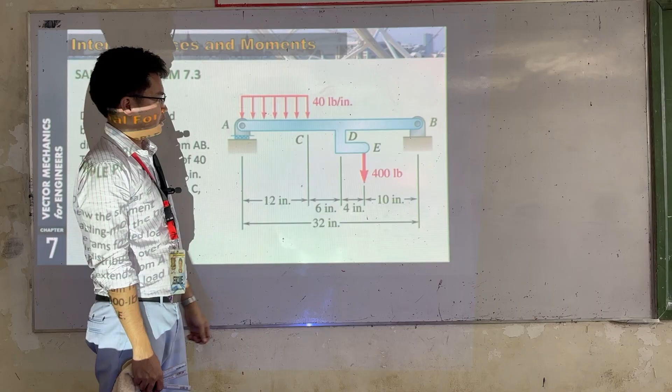So ayan, no? Ano sabi dito? The uniformly distributed is at span na 12 inches. And then we have a concentrated load applied at point E, no? So given na yung mga distances, given yung amount nila. Yung tanong niya dito is, i-drawing mo daw ang shear and bending moment diagram, no?

So technically, yung drawing talaga natin dito is tatlo. We have shear, moment, at saka yung load, no? Yung load diagram natin is represented by our FBD. So ito yung load diagram natin, no? I-drawing natin yung load diagram, schematic lang, gawa lang tayo ng straight line, no?

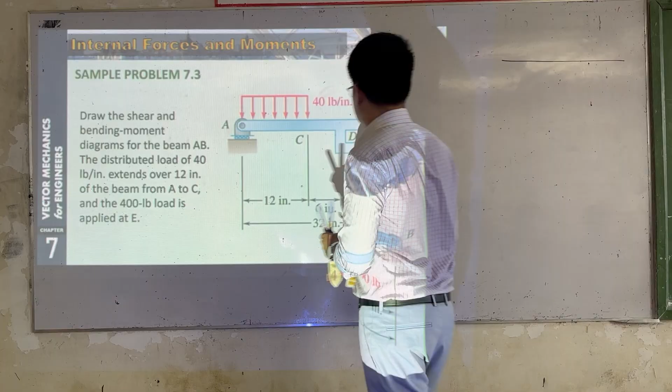And then ilagay natin yung mga points. We have point A, point C, point B. So sulat natin yan. We have point A, point B, point C, and hindi pala—C, D, and then B natin.

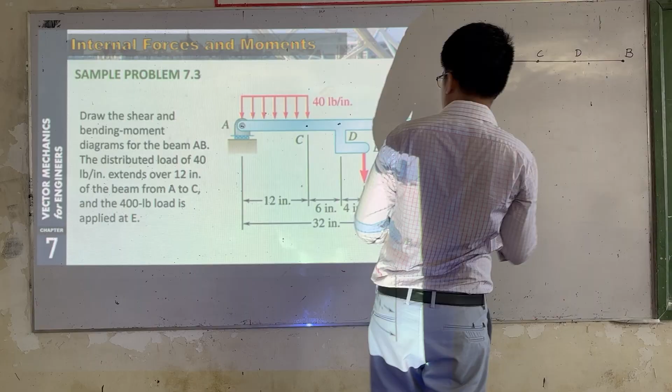So ano yung graph natin dito sa load diagram? We have a uniformly distributed, no? So from here papunta dito, uniformly distributed. Ano yung height nito? 40.

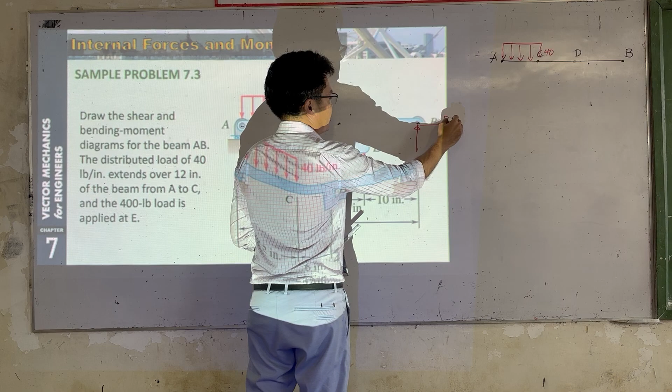So sige, before tayo mag-proceed pala sa shear and moment diagram, isolve muna natin yung reactions at the support, no? So ano yung mga reactions natin dito? We have sabihin natin papunta doon and papunta dito. We have BX and BY. This one here is we have AY only, no?

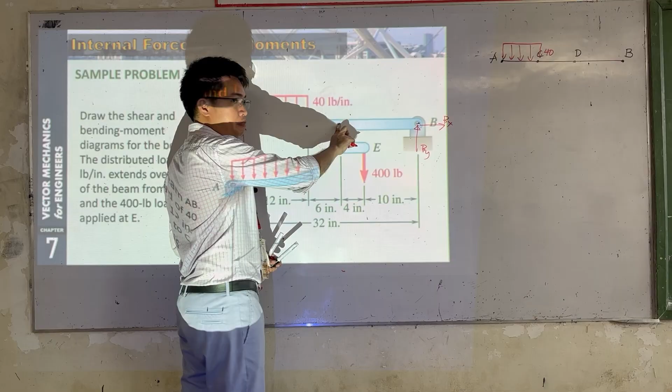How about sa point D? So by principle of transmissibility, pwede ko itong ilipat dito. Tama? Pero ano yung madadagdag? Diba? Basta along the line of action, walang madadagdag. Pero kung hindi ang line of action, ano yung madadagdag? Moment. So ito, ilipat natin dito.

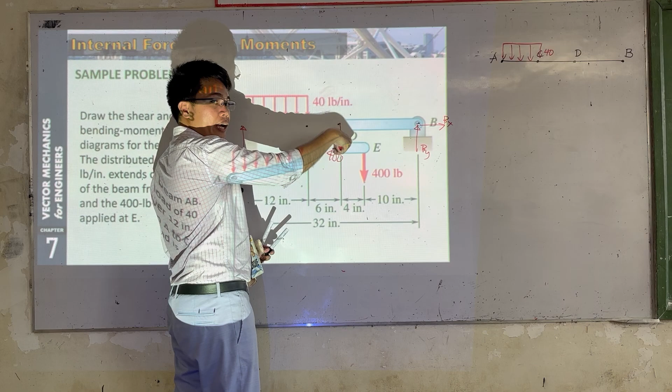This one here is 400. Pero meron tayong madadagdag na moment. Ano yung moment? Clockwise, counterclockwise. Ito. We have clockwise, no? So meron tayong madadagdag na clockwise moment. So ano yung moment niya?

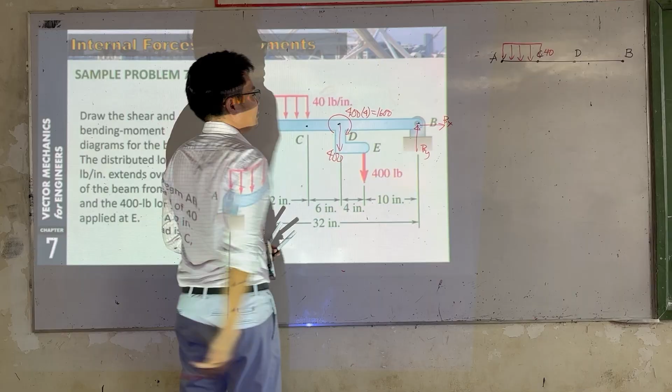400 times the moment arm. Ano yung moment arm na to? 4. So we have 4 times 4 is 16. So 1,600. No? This is the moment at point D.

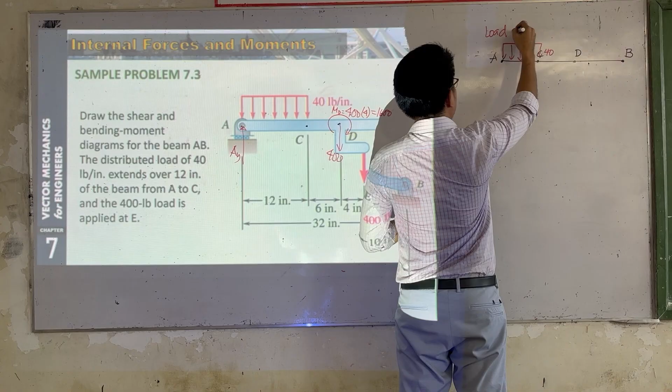So ayan lang. No? So kung i-drawing natin yung tinatawag natin na load diagram, so at point D, meron na tayong, ano yung force natin? Force na 400 and then moment na 1,600. Okay? How about reactions at the support?

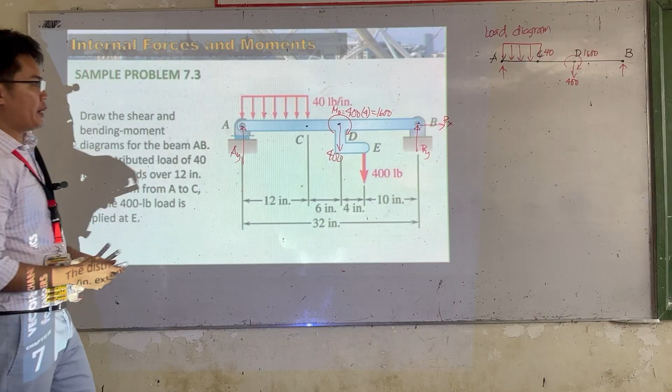Ayan. Meron ba tayong BX? Wala, no? So erase na lang natin diretso. BY na lang. So paano natin kunin si BY? So para makuha si BY, mag-moment tayo at point A, no? Para makuha si BY, summation of moment at point A, counterclockwise positive, ano yung mangyayari?

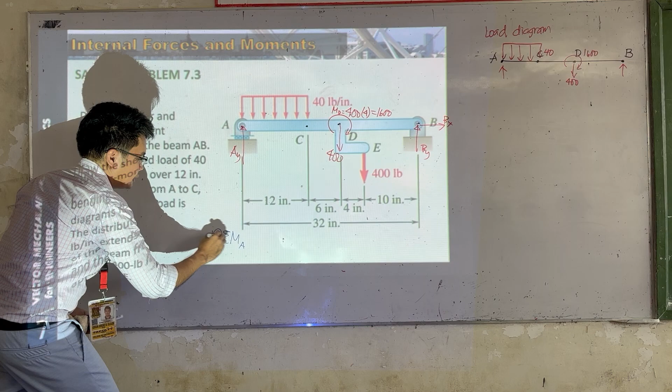Sir, paano yan? Meron tayong distributed force. Ano ba yung gagawin natin kapag meron tayong distributed force? So dito na papasok sa centroid, no? So babalik ulit tayo sa centroid. So nasaan yung centroid ng rectangle?

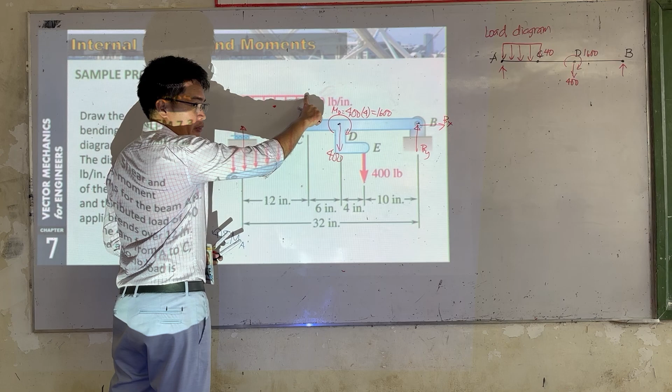Nasa center automatic, no? So ayan, yung uniformly distributed load natin yan, pwede nating palitan ng concentrated load applied at the centroid. The same pa rin yung effect niya, no? So instead of looking at our figure in this manner, uniformly distributed, papalitan natin ng concentrated load applied along the centroid. So ano naman yung value ng concentrated load na ipapalit natin?

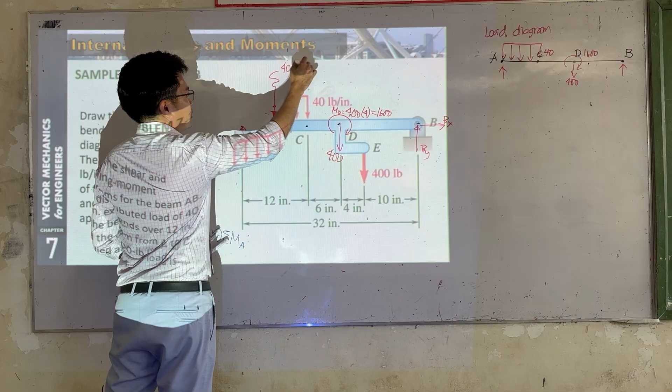So kung ano yung area nito, yan yung value ng concentrated load. So ano yung area nito? We have 40 times 12. So 40 times 12, this one here is, ilan na siya? 480. So ano yung distance?

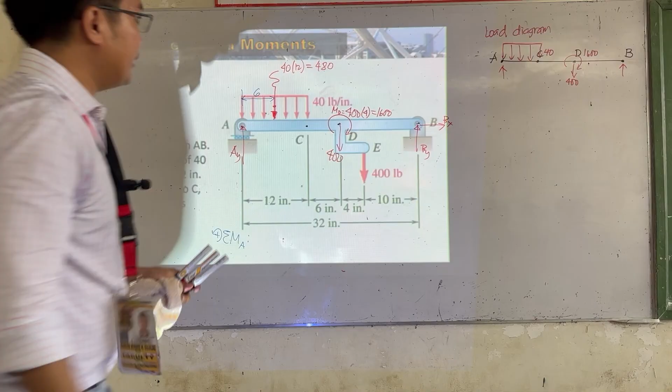Distance nito? We have 6. No? So ayan lang pala. Pwede daw palitan natin si dito ng concentrated load. No, na ano yung value? 480.

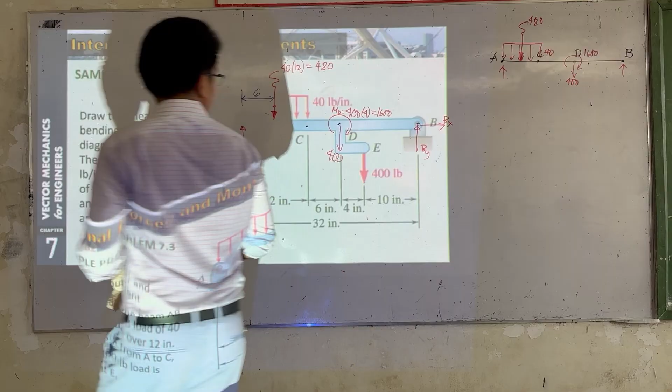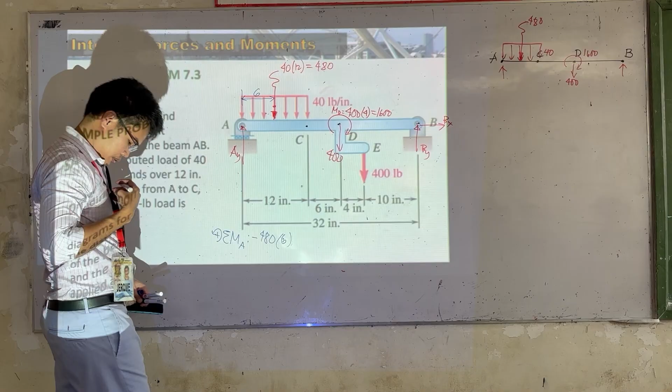So ayan lang, no? So sige, para mahanap natin si BY, paano natin kukunin? Summation of moment at point A. So ano yung meron? We have negative 480 times 6. And then we have ito siya, 400, no? Negative pa rin. 400 times, ano yung distance na to? 18.

And then meron tayong moment na negative din. So we have negative 1,600. Lagyan ko pa ng moment arm, hindi na. Hindi na, naka-moment na, no? So ito, lastly, we have positive BY. Ano yung moment arm? 32. No? So ayan, 32 is equal to 0.

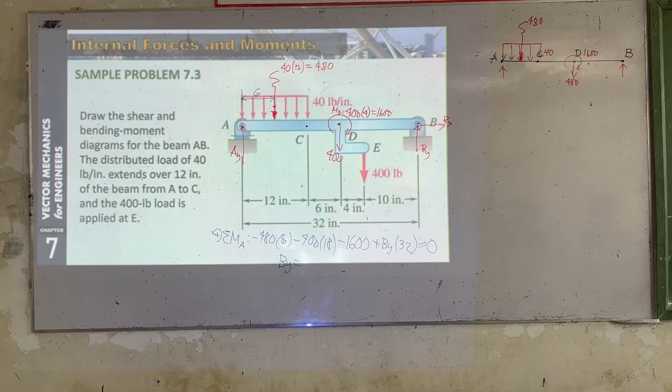So makakakuha tayo dito ng BY is equal to, okay, 365. Ayan, susulat natin dito, 365. And then lastly, sa A, paano kunin si A?

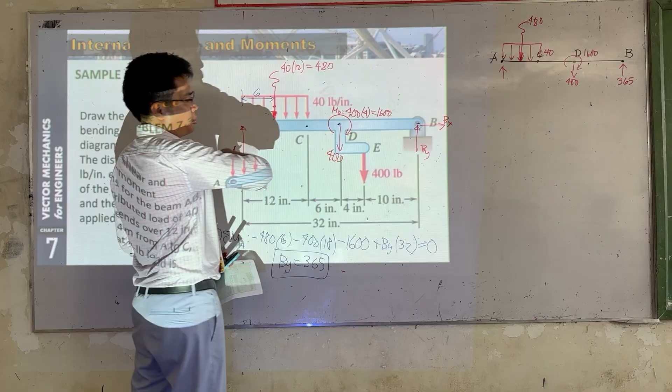Summation of moment at... sige, assuming nakuha na natin si A, no? Alam niyo naman paano kunin, no? Susulat ko na lang. AY is equal to 515.

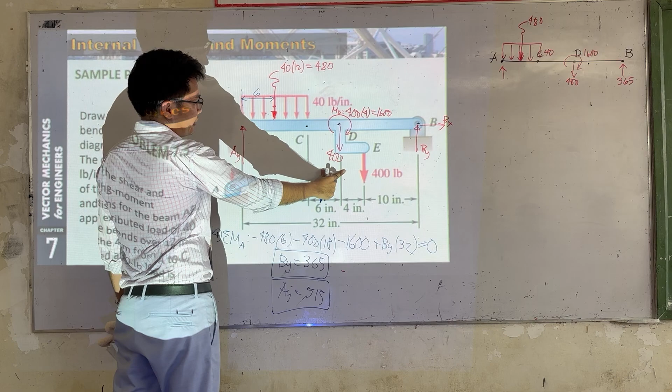Ha? Summation of forces pwede. Oh. Summation of forces lang. So, 480 plus 400 minus 365. No? So, ayan. Sige, ito na yung load curve natin.

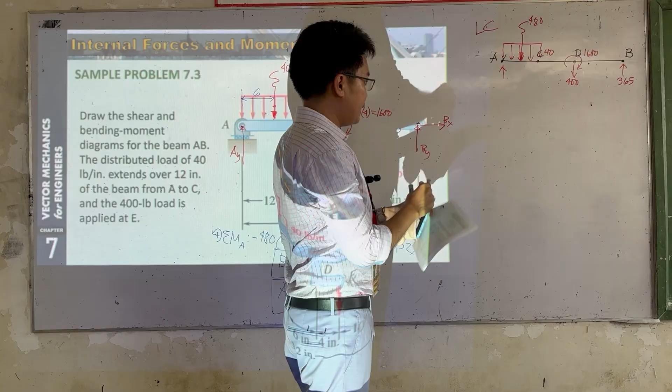Proceed tayo sa shear and moment diagram. Grabe kataas na solution, no? So, ito yung moment, ito yung shear, andito tayo magkakat. Sabihin natin dito. No? So, ito yung sa shear, ito yung sa moment, ito yung X. Sige. Yung gagawin natin dito is i-project lang natin to, no?

Now, ilang segment yung ikakat natin? We have, ito, i-cut natin dito, no? Somewhere dito, i-cut natin to, i-cut natin dito, and then i-cut natin dito. Okay? So, sige. Kung mag-cut tayo dito, ayan, ano yung lalabas dyan?

So, we have, ano yung value ng A? 515, no? We have 515. So, meron tayong force na 515. And then, meron tayong distributed load na ito, no, distributed. Ano yung height niya? 40. Now, ano naman yung distance niya? Ito.

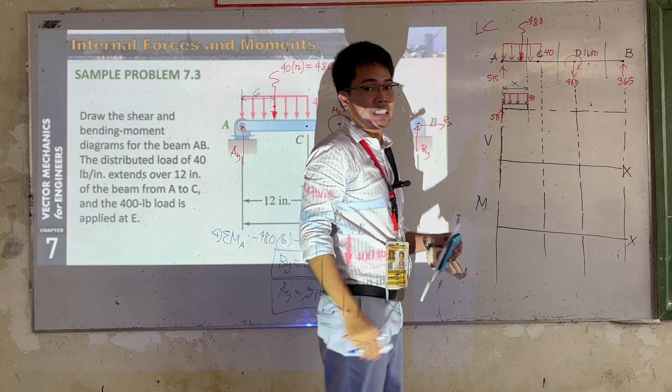X is arbitrary between A to C. So X lang yung value muna natin. Huwag half, kasi hinati ng dalawa, half na dayon. And then huwag kalimutan, we have a downward shear and a counterclockwise moment.

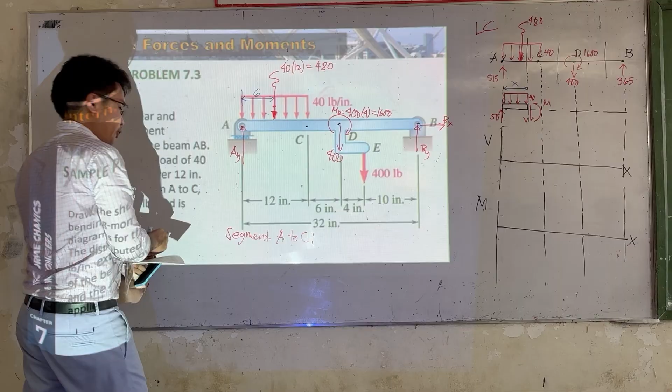Klaro? So sige, draw natin yung shear and moment diagram. Sulat natin, anong segment yan? Segment A to C. So ano yung dalawang equation na paulit-ulit gamitin dito? Summation of forces along Y.

Positive, upward. So ano yung mga involved? This one here is distributed, di ba? So pwede natin yan palitan ng concentrated, applied at the centroid, dito sa gitna. So ano yung ipapalit natin na value? Ang area nito. We have 40 times X. So the concentrated load is 40X.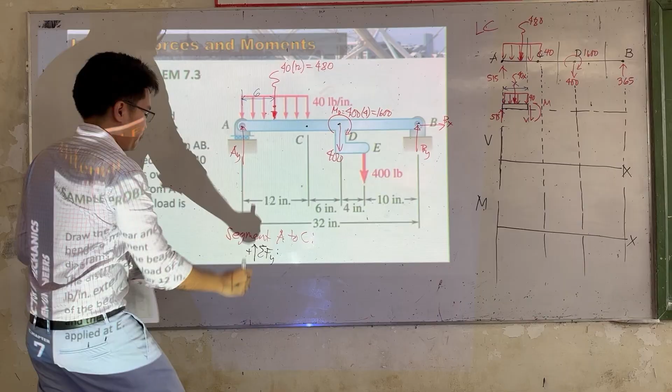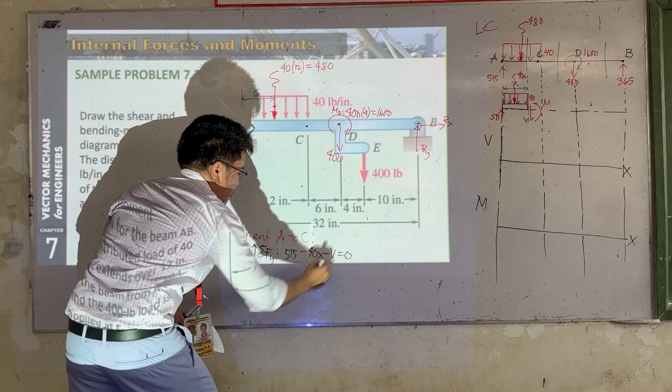Klaro? Summation of forces along Y, we have 515 minus 40X minus V is equal to 0. Therefore, yung V natin dito is equal to 515 minus 40X. Ano yung graph ng shear natin?

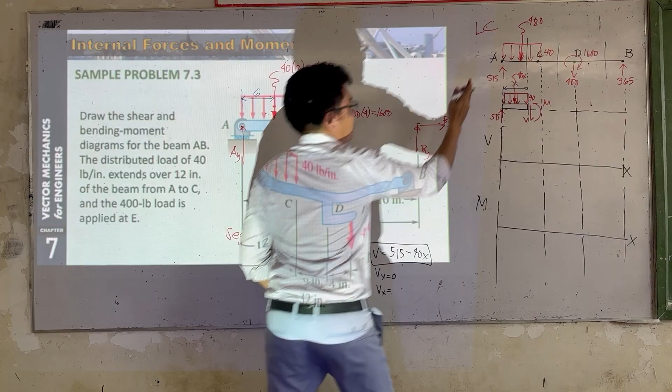Linear. So ano yung kailangan? Dalawang points, the shear at x equal to 0 and the shear at x equal to, from 0 to 12. So solve natin: 515 minus 40 times 0, we have 515. Dito naman, 515 minus 40 times 12 is equal to, we have 35. Positive.

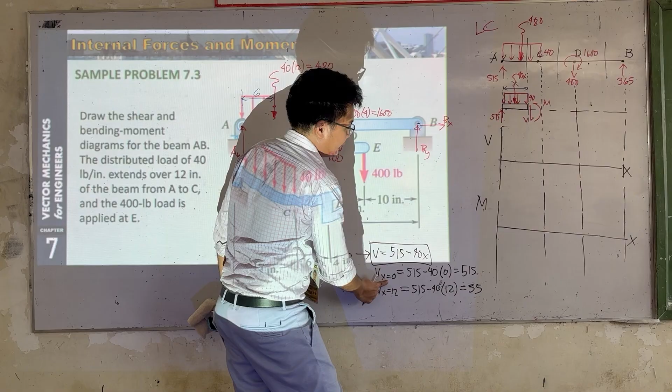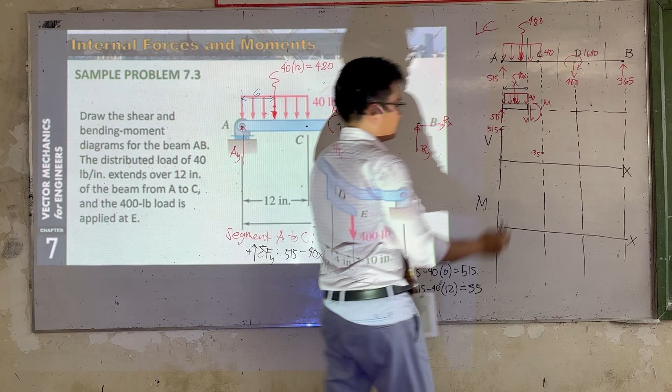So ang shear natin at x is equal to 0 is 515. Dito sa taas, somewhere dito, this point here is 515. And then at this point, sa C natin, we have 35, somewhere dito sa taas din. Sabihin natin this is 35. Ano yung graph nito? Linear, so gagawa lang tayo ng straight line.

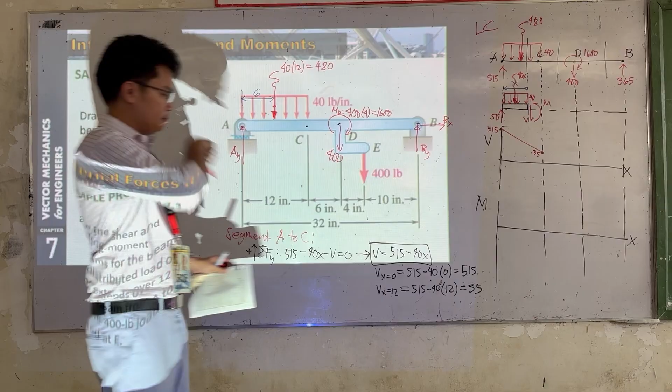Okay? Now at point C, meron pa bang shearing na nilagay natin dyan? Yung concentrated load, wala, no? So stay put lang tayo sa 35. Sige, punta na naman tayo sa moment. Summation of moment at this point, counterclockwise positive.

So ano yung mga moment? We have negative 515. Ano yung moment arm ni 515? We have x. Ano yung susunod? Concentrated, we have 40x positive times the moment arm. Ano yung moment arm? X over 2. Bakit x over 2, sir? The distance is x, kalahati ng x is x over 2.

Meron pa ba? Ay oo, plus M is equal to 0. So therefore yung M natin dito is negative 20x squared. Ito siya is positive 515x. So ano yung graph natin dito?

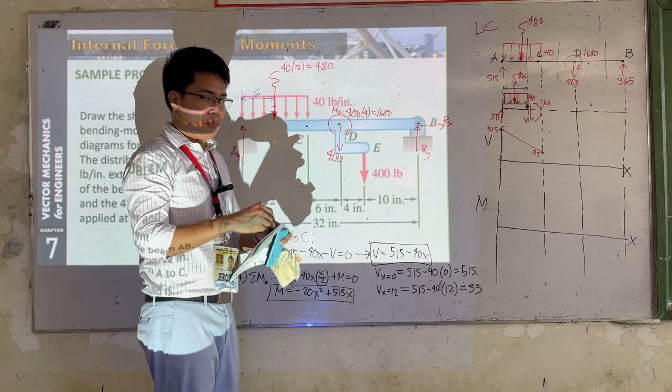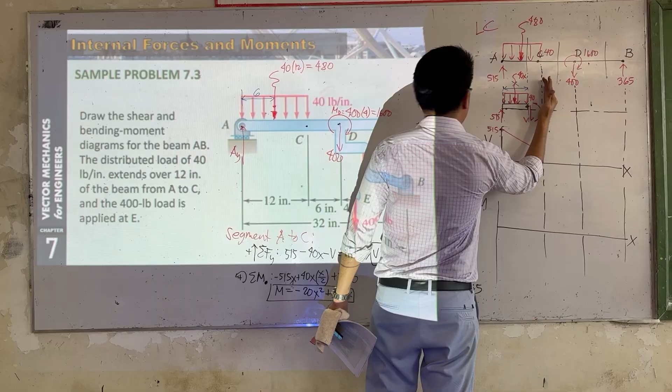It's quadratic, no? So paano natin malalaman if yung parabola natin is smiling or frowning? Kapag negative, frowning. Kapag positive, nag-i-smile. So we only need to have 2 points lang and then itansya na lang natin yung graph natin. So we have, ano yung value nito, from x is equal to 0 to x is equal to 12. So sige, yan din yung gagawin natin dito. Mx is equal to 0 at mx is equal to 12.

So substitute, negative 20 times 0 squared plus 515 times 0 is 0. Then pasolve daw: negative 20 times 12 squared plus 515 times 12. Okay, 3,300. So sabihin natin that yung moment natin dito is...

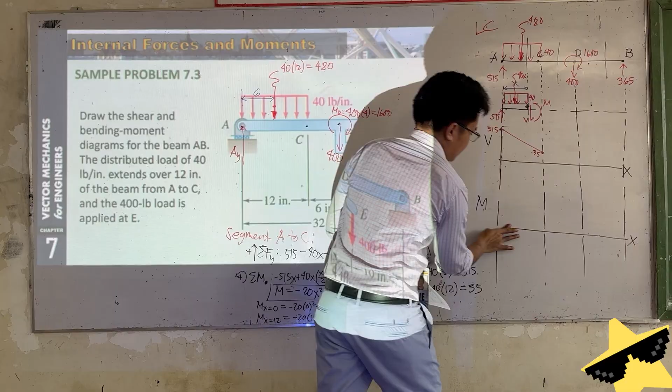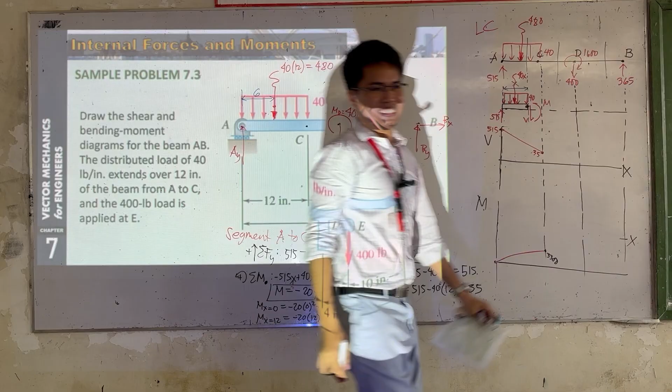Dito na lang tayo, para may space pa. So at x is equal to 0, yung moment daw is 0. At x na dito sa C, yung moment is 3,300. So somewhere dito, sabihin natin this is 3,300. Ano yung graph nito? Frowning, no? So magpa-frown tayo. Hindi to linear ha, frowning.

Okay? Klaro? So sige, proceed tayo sa next. Grabe kataas, no? Erase natin to. Next segment, punta tayo sa next segment. So at this segment here, ano yung mga lalabas dito? We have distributed load na hanggang dyan lang, pwede natin palitan ng concentrated load.

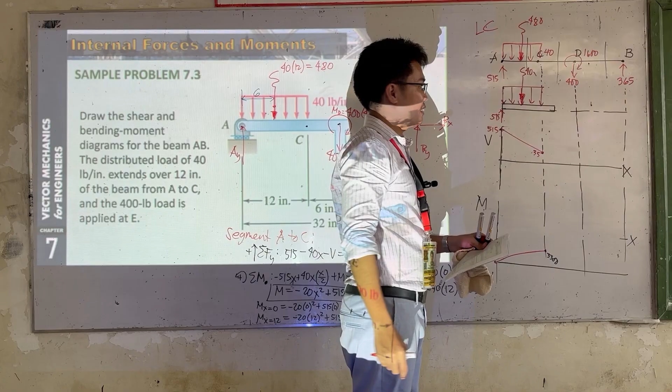Ano yung value ng concentrated load na to? 40 times x. Ano yung length nito? 12, so times 12 na. Kasi yung segment natin is hanggang dito. Ito siya is meron ng exact value.

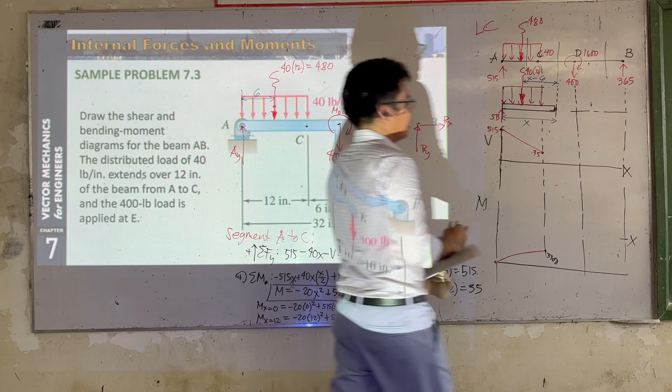Tama? Now ano naman yung distance from ito? We have, so kung yung distance na to is x, ano yung distance na to? We have x minus, ano to? This one here is 12, so kalahati nito is 6. So x minus 6. So ayan lang, so we have downward shear and counterclockwise moment.

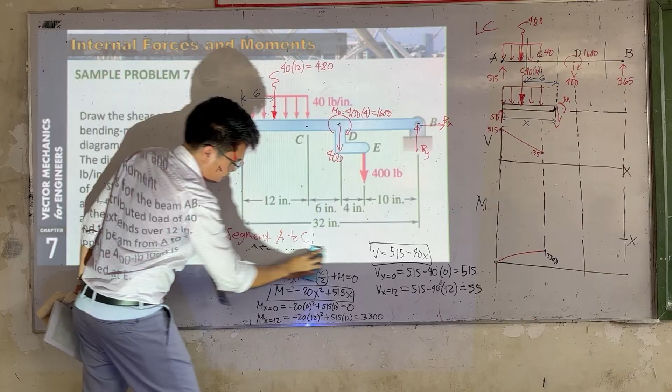Klaro? Erase natin to. Sige, ano yung dalawang equation na gagamitin? Summation of forces along y, positive upward. So ano yung mga equation dyan? We have 515 minus 40 times 12, minus v is equal to 0. So ayan, ano yung v natin dito?

V is, ilan eh? We have 35. So ano yung graph na to?

Constant, ibig sabihin straight line. Now at point D, meron bang shear? Meron, ano yung shear natin? Bababa daw ng 400. So kung bababa tayo ng 400, ano yung value nito? We have 365 negative.

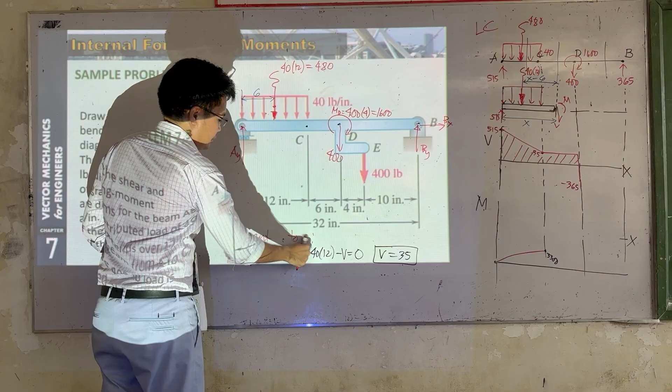Anong segment to? Segment C to D. Ayan lang. Now next, we have summation of moment at point, positive, ganyan, so we have negative 515.

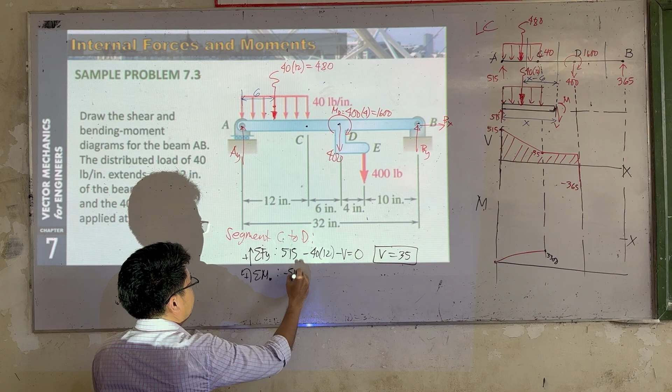Ano yung moment arm? X. Plus, ay plus pala. 40 times 12 times, ano yung moment arm? X minus 6. Yan lang ba? Plus M is equal to 0.

So yung M natin dito, pila niya? 35x. And then ito times ito, 2,880, negative, positive, ayan positive. Tama na to?

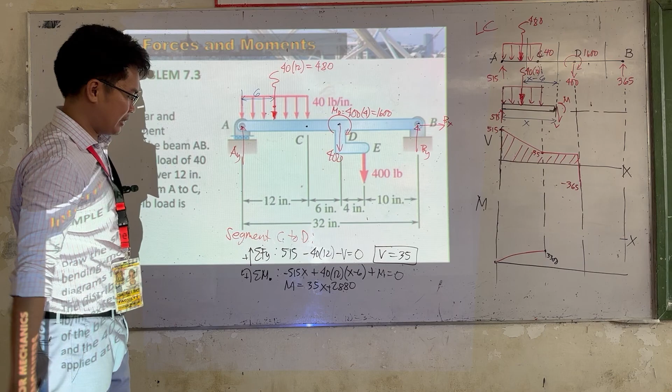Ano yung graph natin dito? Linear, so the same pa rin. At M at x is equal to, ano yung x natin? X at, second segment pa pala tayo. Ang tagal, 12, and then Mx equal to, we have 18.

So we have here 35, pakalkyo daw, plus 2,880. And then 35 times 12 plus 2,880. Ito siya is 3,300. How about this one? 3,510.

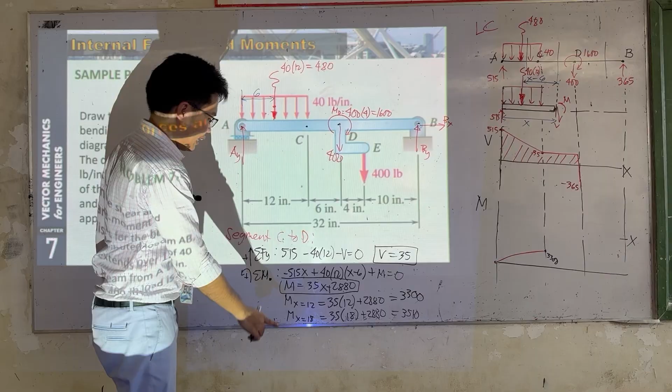So ayan, at x is equal to 12, tama tayo, 3,300. At x is equal to 18, we have 3,510. So somewhere a little bit above sa 3,300. So somewhere, sabihin natin dito. Ano yung graph na to? Linear, so gagawa lang tayo ng straight line.

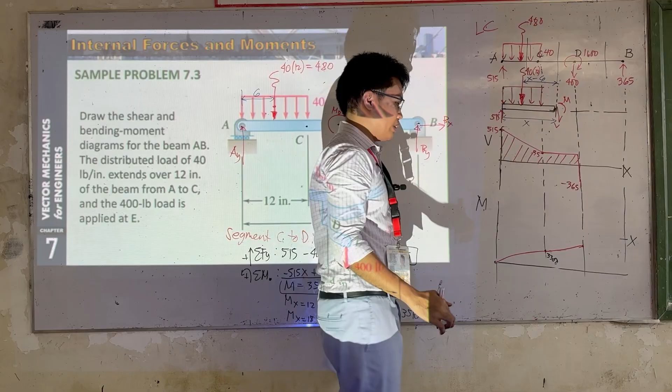So sa drawing ninyo din, gawin yung smooth. Kung parabolic to and then combination ng straight line, somewhere or somehow yung graph niya, gawin yung smooth, kasi continuous yung beam natin. So gawin yung smooth yung graph.

So ayan lang. Now at this segment here, meron bang additional moment? Yes, 1,600. At kung meron kang clockwise na moment, yung gagawin mo ay idadagdag mo lang dito. Kung yung moment mo is counterclockwise, ima-minus mo dito. So since ito is clockwise, we have ano yung value ulit dito?

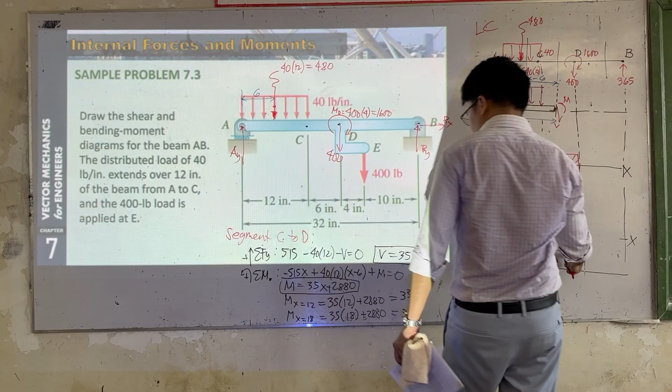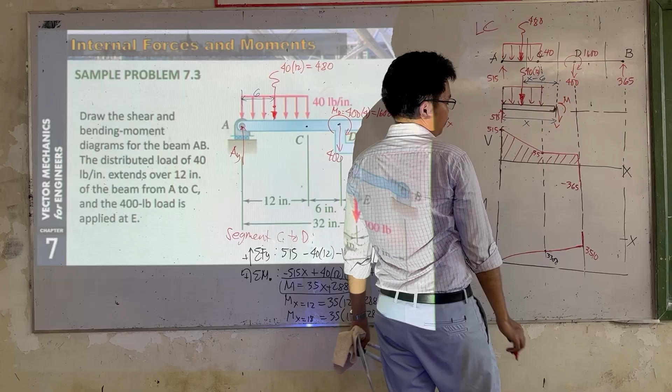We have 3,510. And then idadagdag mo plus 1,600, ano na yung value niya? Somewhere ito, ilan na yung value niya? 5,110. So ayan lang, okay na?

Sige, last segment. Sige, last na tayo. Erase natin to. Sige, going to the last segment. So somewhere dito.

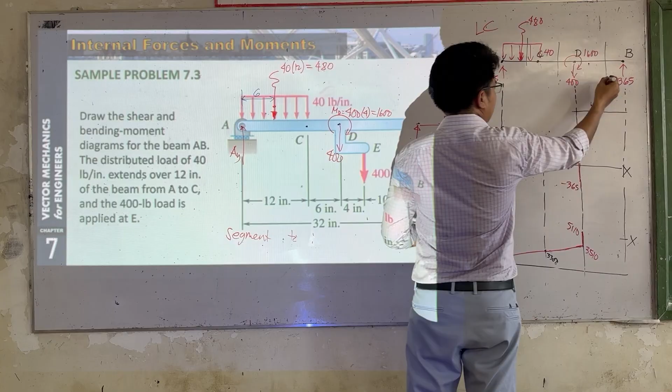So we have a force na 515, distributed load na concentrated, we have 40 times 12, and then dito we have a moment na 1,600 and a force na, downward pala to, 400. So we have here the reactions, ay the internal shear downward counterclockwise moment.

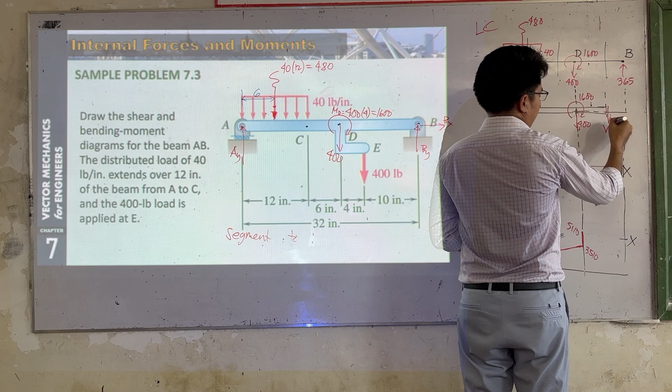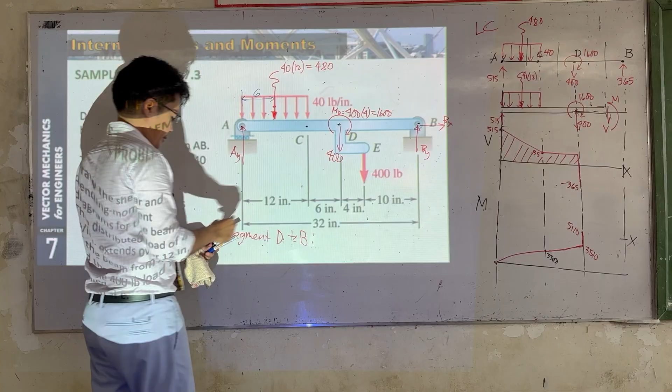So ayan lang. So segment, ano segment to? DB. So dalawang equation na paulit-ulit. Summation of forces, positive upward. Ano yung involved? 515 minus 40 times 12.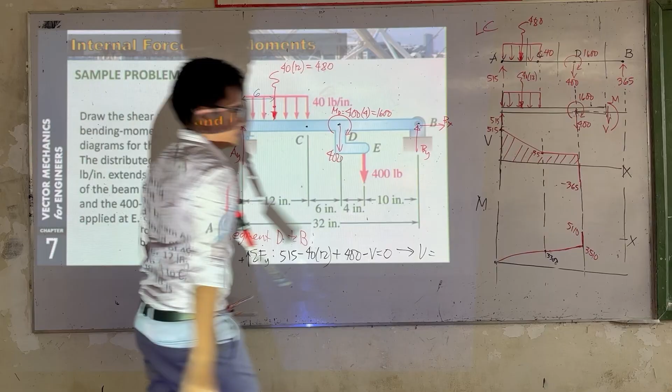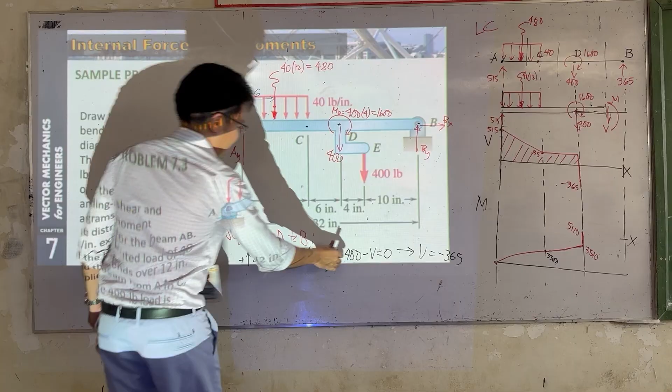Ano pa? Plus 400 minus V is equal to 0. So we have here our V equal to, pila yung V natin? It's negative 365. Sorry, minus 400. 515 minus 40 times 12 minus 400 minus V.

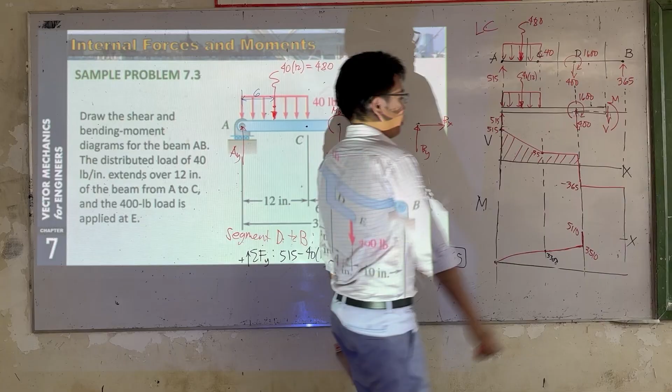Tama na to? Sige, so constant man daw yan. Ibig sabihin, from D to B is constant. Now at point B, babalik tayo sa 0. Magkakabalik ba tayo? Ano yung By na nakuha natin dito? 365 yun, ito 365.

So babalik tayo sa 0, kasi negative 365 plus 365 is 0. So ayan, complete na yung shear diagram natin. Sige, moment naman tayo.

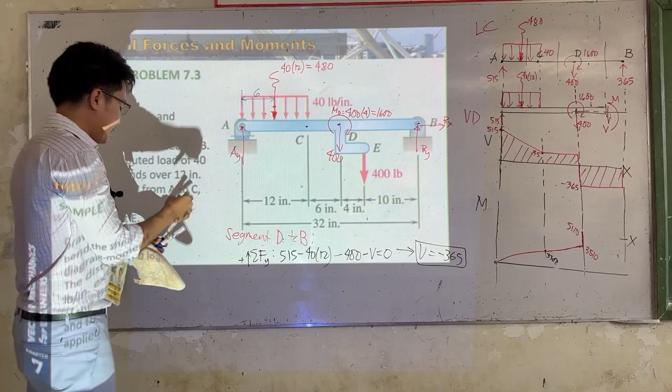For the last moment at that point, positive counterclockwise. Ano yung mga moment? Negative 515. The moment arm is? Sige daw. Ano yung mga moment arm? The distance nito is x.

Ano naman yung distance na to? We have x minus 6. Ano naman yung distance na to? X minus 18. So ayan lang yung mga moment.

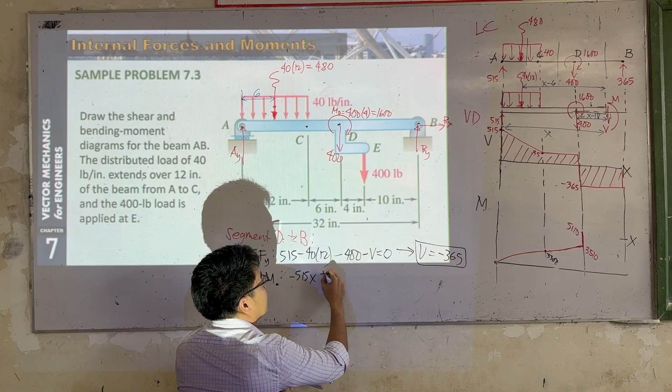So 515 times x plus 40 times 12 times x minus 6. And then isa pa, we have plus 400 times the moment arm, x minus 18. And then meron pa ba? Meron pa, we have negative 1,600. And then lastly is positive M is equal to 0.

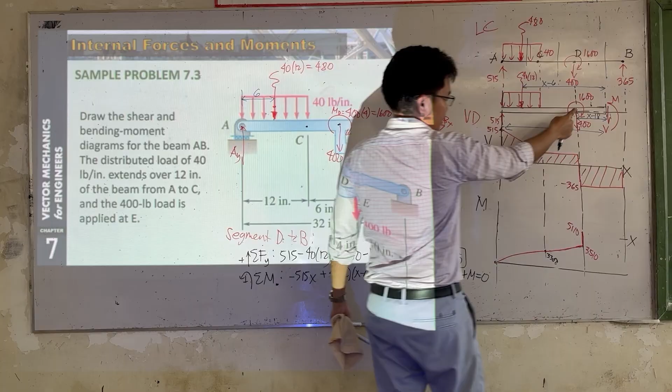So saan galing yung negative 1,600? Ito, negative because it's clockwise. Kasi yung convention natin, counterclockwise is positive. So sige, solve natin yan.

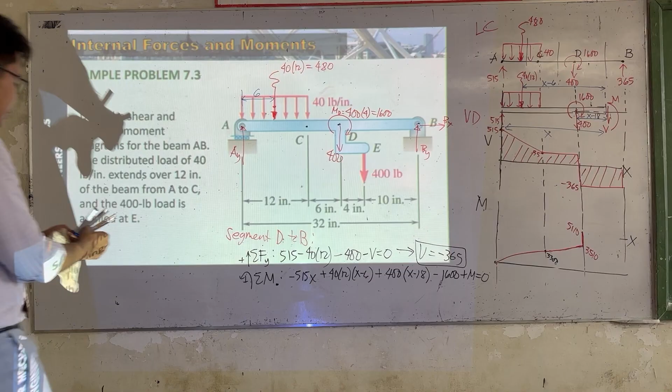Ano yung value ng M? M is linear quadratic. So we have here our M equal to 11,680 minus 365x. So we have here linear.

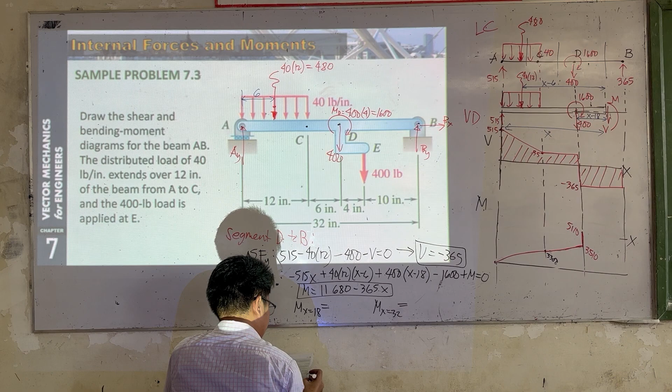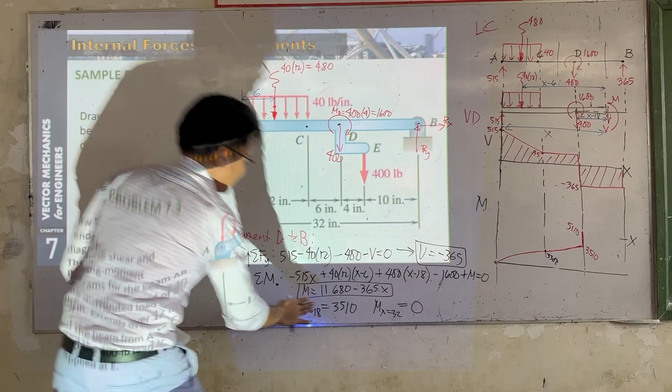So substitute lang natin, M at x is equal to, ano yung isa-substitute natin na x? 18, is equal to, and x is equal to 32. Ayan, so makakakuha tayo dito ng 0 and 3,510. Okay, so 3,510, it's 5,110 kung i-substitute lang natin yung value.

So linear, ibig sabihin, this point and this point here, gagawa lang tayo ng straight line. So ito na yung moment diagram natin. Okay?

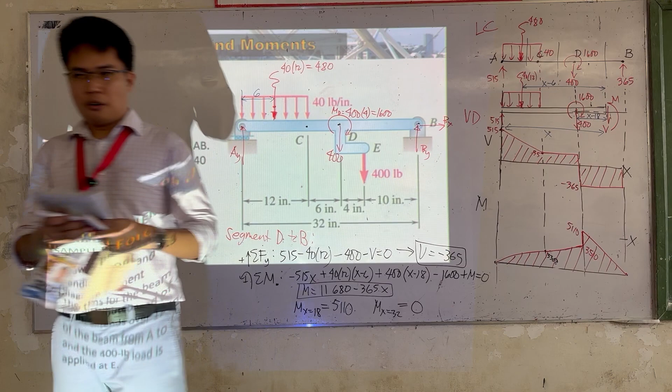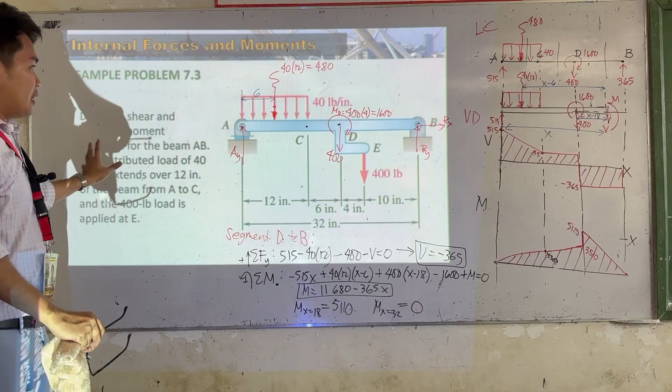Kanina problem, taas kayo bilang solution, grabe kataas. So anyways, itong approach na to, one method lang to. We have another method na yung drawing lang, so hindi ka na magsusolve-solve. Diretso mo na tingnan, ay ito siya, area niya is rectangle. So i-minus ko lang dito.

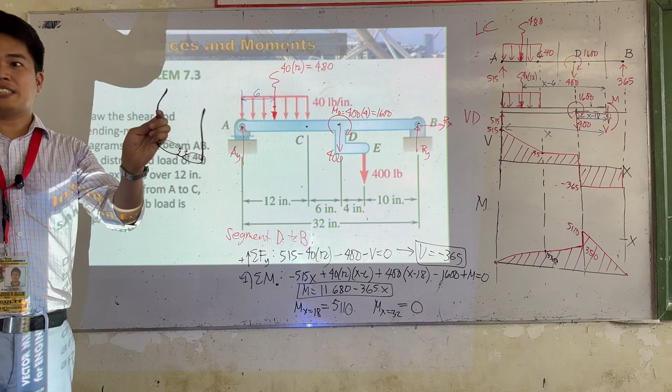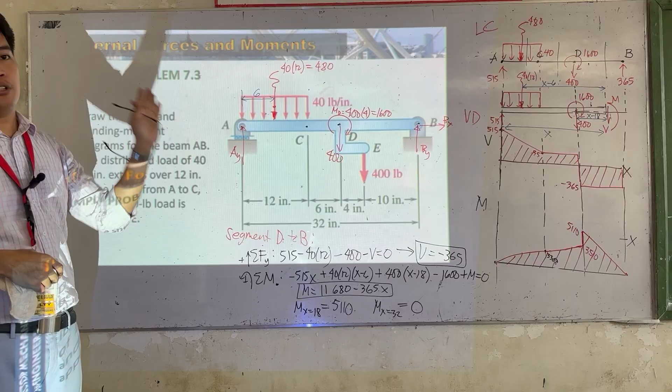So ayan, so yan yung next example natin. So ito siya is medyo mahaba talaga yung approach na to. Kagaya yung sa trusses, we have joints at saka section, yung joints sobrang haba, yung section diretso. So ito din meron tayo dito, ito yung i-calculate natin pa isa-isa, and then yung isa is graphical. So sige, discuss natin yung graphical, o next meeting na lang.